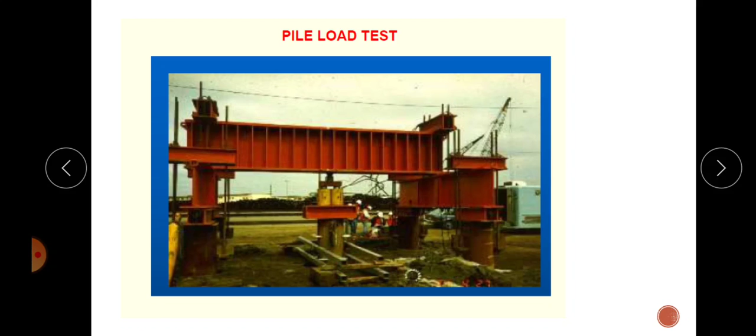So pile load test is the experiment in order to find the load carrying capacity of a pile. So in this figure, it is the pile whose load carrying capacity is to be found out. So for finding the load carrying capacity of any pile, we are conducting pile load test. So this is the test pile.

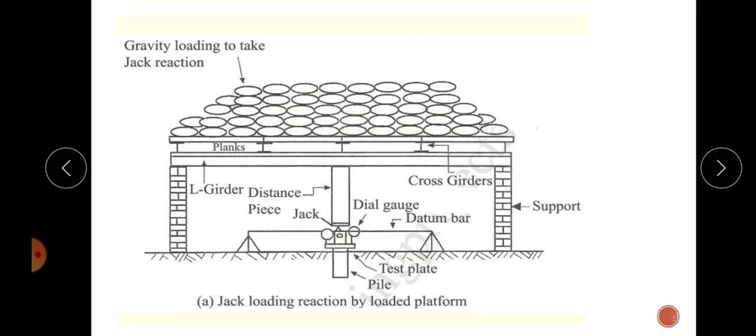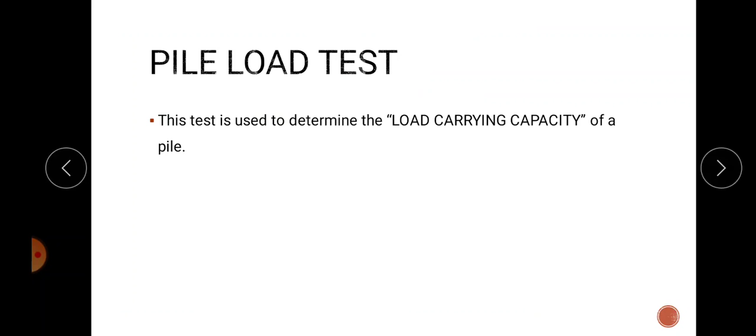So for testing that, we have to apply external load. This external load can be applied by using gravity loading, or we can use reaction truss for loading this test pile. So pile load test means it is the test which is used to determine the load carrying capacity of a pile.

And the equipments for pile load test are anchor girder or reaction girder, and this will provide the load to the pile. And there is hydraulic jack, and using this hydraulic jack we are applying load to this test pile, and this is a test pile, and these two are anchor piles. So this is test pile, that is, load carrying capacity of this pile has to be determined,

and these are anchor piles. Two anchor piles will be supporting the test pile, and there is dial gauge in order to read the settlement of the pile, and reaction truss if it is truss loading, that is, if we are giving load using truss setup, there will be reaction truss. So these are the basic equipments for pile load test.

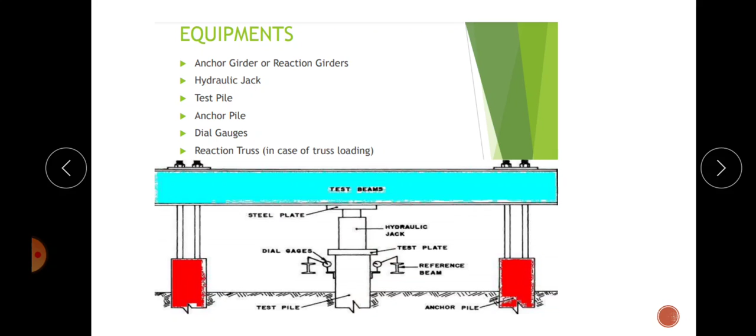And procedure: the setup consists of two anchor piles provided with an anchor girder or reaction girder at the top, and the test pile is installed between the anchor piles as a foundation pile is installed. And the test pile should be at least 3B or 2.5 meter clear from the anchor pile, that is, the minimum distance between the test pile and anchor pile is 2.5 meter or 3 times the width B.

And the test is conducted after a rest period of 3 days after installation in sandy soil. That is, if we are constructing the pile on sandy soil, the test is to be conducted 3 days after constructing the pile. And if the pile is inserted in silty or soft clays, we can conduct the test after a period of 1 month.

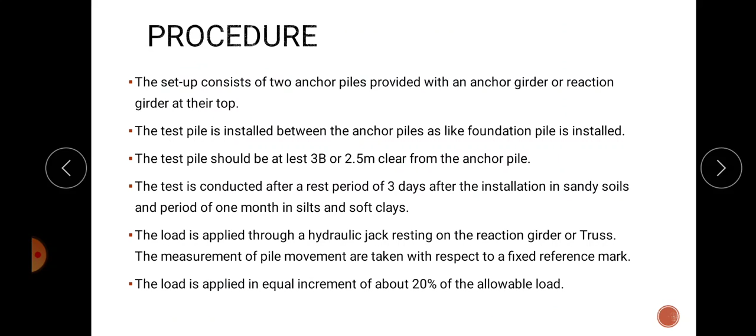And the load is applied through a hydraulic jack resting on the reaction girder or truss, and the measurements of pile movement are taken with respect to a fixed reference mark. We can measure the settlement using dial gauge. And the load is applied in equal increments of about 20% of allowable load. And the settlement should be recorded with 3 dial gauges.

And each stage of loading is maintained till the rate of movement of the pile top is not more than 0.1 mm per hour in sandy soil. And for clay soil, the loading is maintained till the rate of movement of the pile top is not more than 0.02 mm per hour. So like that we are maintaining the loading.

And under each load increment, the settlements are observed at 0.5, 1, 2, 4, 8, 12, 16, 20 and 60 minutes. That is, we are recording the settlements after 0.5 minute, then after 1 minute, then 2 minutes, 4 minutes, etc.

And the loading should be continued up to twice the safe load, or the load at which the total settlement reaches the specified value. So if the settlement reaches the specified value, we can stop loading, and also if the applied load is twice the safe load, we can stop loading.

And the load is removed in the same decrements at 1 hour interval, and final rebound is recorded 24 hours after the entire load has been removed. When we are removing the load, there will be rebound, that is, it will regain its original position. So that rebound also has to be recorded after 24 hours.

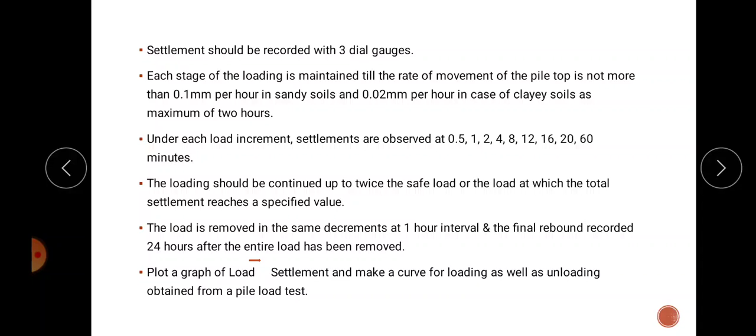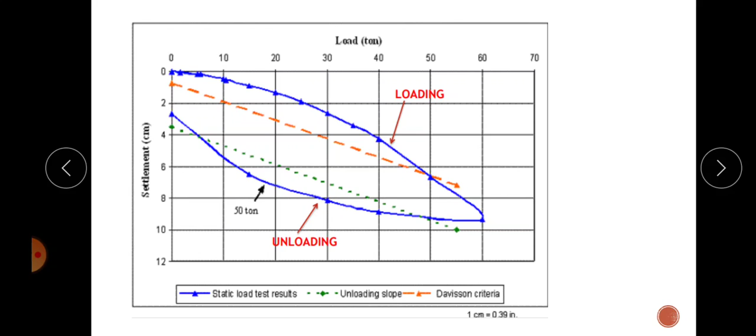This figure shows a typical load settlement curve for loading and also unloading from the pile test. And for any given load, the net pile settlement, that is SN, net settlement is equal to total settlement minus elastic settlement. Total settlement means gross settlement, and elastic settlement is the settlement during rebound, that is unloading. So if you want to find the net pile settlement, it is equal to total settlement minus elastic settlement, and elastic settlement means settlement during rebound. So we will draw the net load settlement curve, and this is the net load settlement curve, load and settlement.

Okay, and here the safe load is usually taken as 1/2 of the ultimate load, that is safe load is equal to ultimate load divided by 2. And according to IS 2911, the safe load is taken as 1/2 of the load at which the total settlement is equal to 10% of the pile diameter, or 2/3 of the final load at which the total settlement is 12 mm, whichever is lesser. That is, if it is less than this one, we can take this value, or if it is less than this one, we can take this value. That is, safe load is taken as half of the total load at which total settlement is equal to 10% of pile diameter, or 2/3 of the final load at which the total settlement is 12 mm, whichever is less. So that is the safe load according to this code.

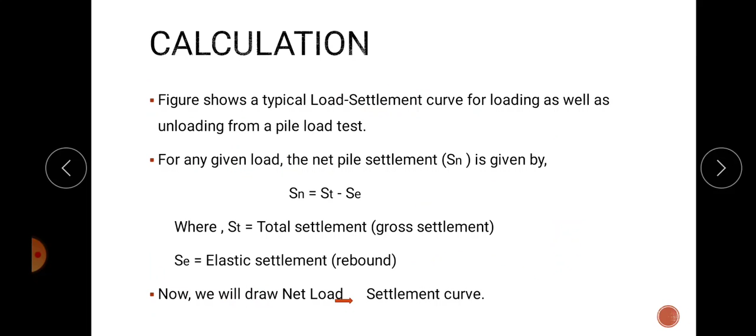And according to another criterion, the safe load is 2/3 of the final load which causes a net settlement of 6 mm. That is, 2/3 of the final load for which the net settlement is 6 mm is taken as safe load. Okay, so from this graph we are calculating safe load by considering these criteria. That is, safe load is taken as 1/2 of the ultimate load simply, and according to code the safe load is taken as minimum of these 1 and 2, and by another criterion we can take safe load as 2/3 of final load which causes net settlement of 6 mm. Okay, so this is the procedure how we are calculating safe load using the pile test. That is, after conducting the pile test we are plotting a graph between net load and settlement. So from this graph we can calculate safe load according to these criteria.

So this is the equipment showing the pile test. This is the test pile whose load carrying capacity has to be calculated, and it is inserted between these two anchor piles, and the distance between the test pile and anchor pile is 2 meter or 3 times D, and we are applying the load using a hydraulic jack, and we are noting the settlement using 3 dial gauges. And we are controlling the load increment by considering which type of soil we have inserted this pile in. For sandy soil the load increment is different, and for clay soil it's also different. So like that we are controlling the load and calculating the settlement, and finally we are drawing the curve between load and settlement, and from that curve we can calculate safe load by considering some criteria and also from code. Okay, so this is the brief about the pile test.

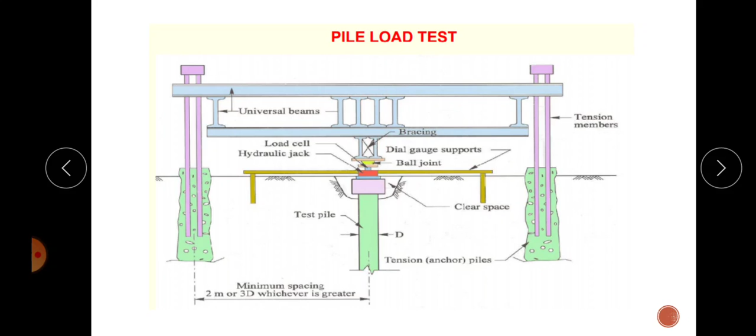So again, the safe pile load, that we have explained in this slide, that is the result: safe pile load is equal to 2/3 of the final load at which settlement is 12 mm, or 1/2 of final load at which settlement is 10% of pile diameter, or half of ultimate load. Okay, so this is the procedure how we are calculating safe load using the pile load test. And also net settlement is equal to total settlement minus elastic settlement.

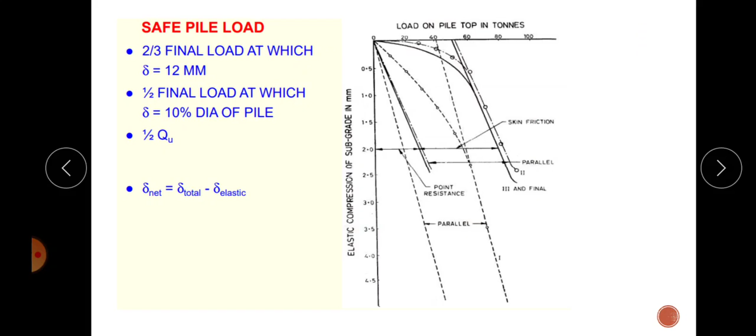Okay, so this pile load test is briefly explained in the Arora textbook, so you should read that textbook, and if you have any doubt, please contact. And this is very important. If in the exam it is asked, you should draw a rough sketch of this pile load test arrangement, and also the result by drawing the graph between settlement and load. Okay, so this is about the pile load test.